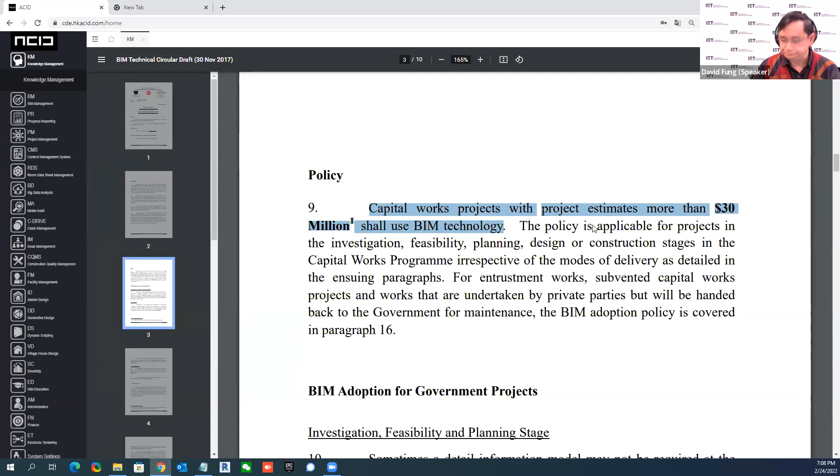But for this very first technical circular, the most important point is that we came up with a so-called BIM use table. Just to have a quick look, we have a BIM use table from BIM use number 1 to BIM use number 20. It covers feasibility studies, planning, design, and construction, and in fact it also hints at the operation side as well.

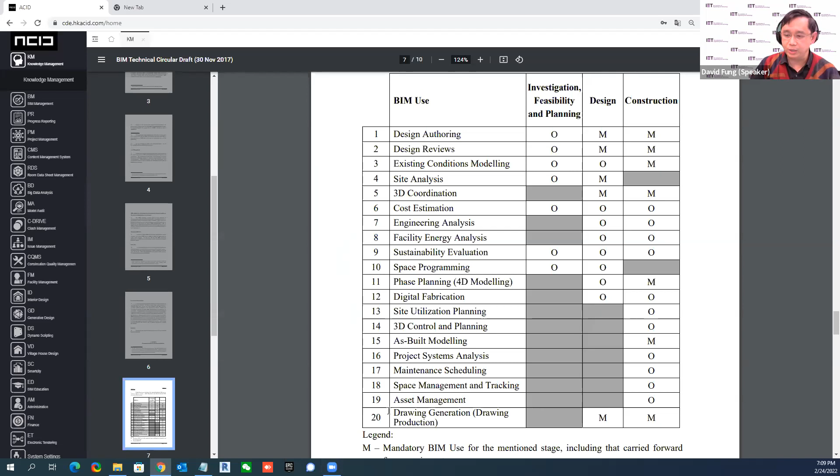Without looking into the details, may I just request you to look at the numbers here: the number of O, optional items, versus the number of M, mandatory items. You can see that back in 2018, the number of mandatory items is relatively small. Now, BIM uses 1 to 20. Let me compare with the latest one we just got.

What has changed throughout the years? As a matter of fact, every December there is a new version of this policy coming out. The very first thing we see is that the 30 million benchmark has not changed. It always states that any building and any construction more than 30 million shall use BIM technology.

But what does it cover? It covers capital works projects. That means if the project funding is coming from the government, they are all subject to this. So roads, tunnels, civil works, and buildings funded by the government are subject to this. Secondly, there are the entrustment works.

So a project for the airport, or a project for the underground railway system, are projects entrusted by the government to these specialists to build the airport or to build the MTR, for example. Those are called entrustment works.

Subvented capital works projects, if I understand correctly, refers to funding subsidized by the government to an organization that carries out its own project. Those projects belong to that organization, but the funding actually comes from the government.

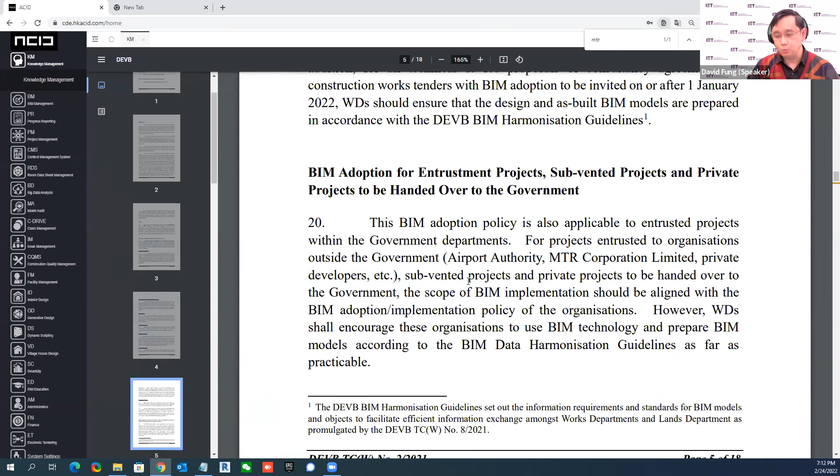So what it really means is it covers most of the work in Hong Kong, apart from the wholly private sector. That's the only sector not covered by this. If we search for a bit more definition on project entrusted organizations, that includes the Airport Authority, MTR, and private developers. So it has really wide coverage on the adoption of BIM. That is one important message: it has a wide coverage.

Secondly, if we look at the BIM use table I just mentioned, the number of BIM uses covered, from 1 to 20, has not changed. For the last 5 years it has always been 20, covering the planning, design, and construction stages. However, if you remember the number of M versus the number of O, there is a significant increase from optional items to mandatory items here.

This has already been implemented since January, and you can see that most of the items here are mandatory to use BIM. So this has huge implications throughout the years. Every December, many optional items become mandatory, leaving only a few optional. Every year there's a gradual implementation towards BIM adoption. So this is another important message to the industry.

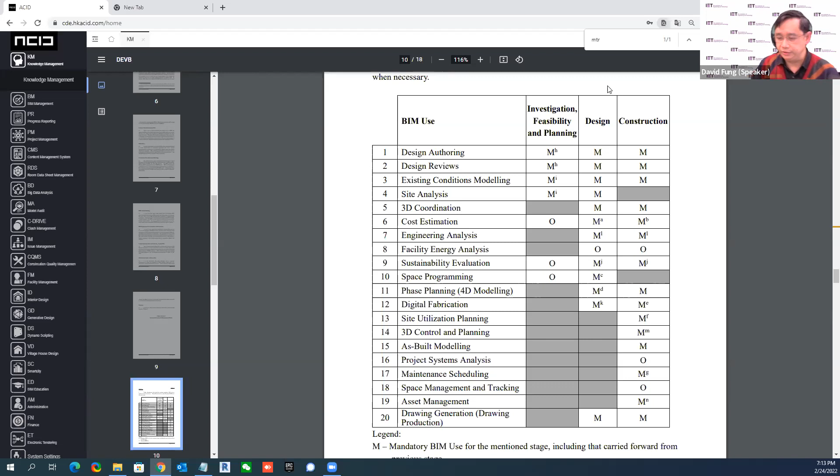Now let's take a look at a little more detail on the BIM uses. What does the policy say? How are we going to use BIM, for example? When you say BIM technology, definitely we are talking about the 3D models. We talk about the different disciplines.

Now, I would like to illustrate to you with real examples how that's related to the policy. You see on the screen here, I'm using a CDE, Common Data Environment, which I will explain a little bit more later on. I'm using an online system to demonstrate to you. Now, it covers stages: planning stage, design stage, construction stage, and operating stage.

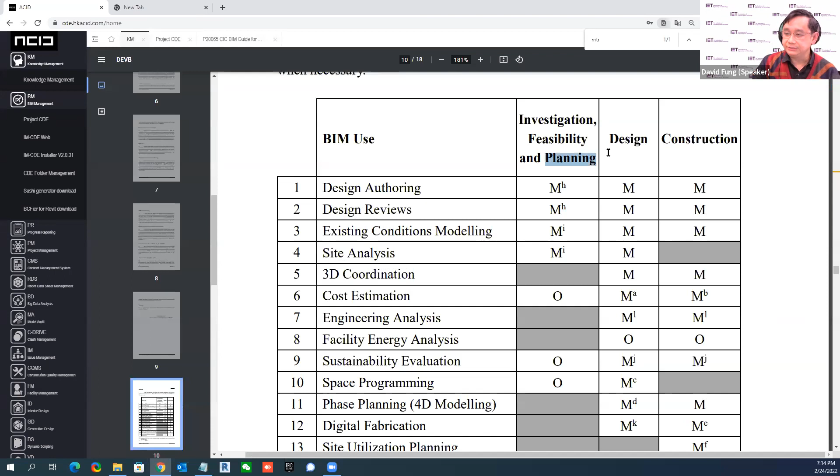All right. So the policies talk about the various stages, the different stages in here. So planning stage, design stage, construction stage. In fact, if you look at the wording here, asset management is talking about the operation phase, maintenance schedule, operation phase. So it is very, very obvious that we have all these different phases.

Secondly, when we talk about the BIM model, the BIM technology, it is not only on one discipline. It covers all the stakeholders, including the architect, the structural engineer, the MEP engineer, the civil engineer, all the stakeholders basically in the industry. So what that really means, they have to use this technology on their design work.

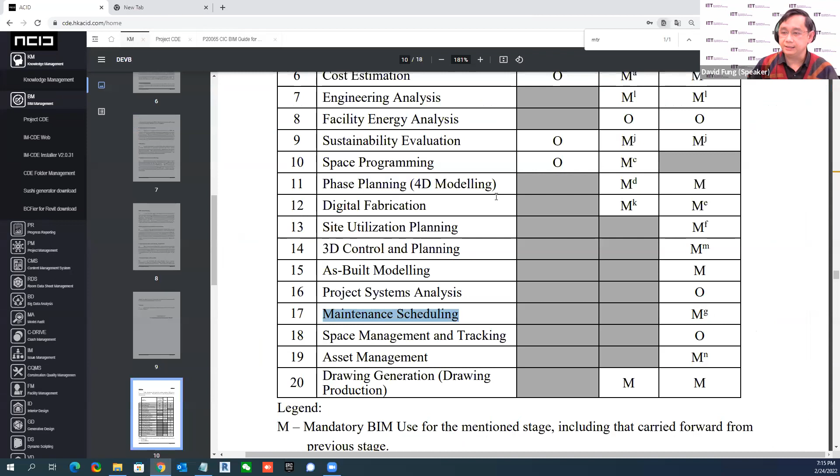Now, if we come back on the very first use in here, we will see that the very first item is called design authoring, which is in the planning stage, design stage, and construction stage. It is mandatory. Now, being an architect myself, I do the design work. Sometimes I do the planning work, and also I administer the contract. I create drawings for the government to approve. I also create the drawings for the tender for the contractor to build it, so it affects the construction.

Now, the policy says that any design author, whoever gets involved in the design, must use BIM for design. So in that case, in here, you will see that we are having the architectural model, the structure model, the MEP model, the landscape model, the civil model, whatever. So that affects every designer in the market.

Now, likewise during the construction in here, the contractor, whoever needs to get involved on the design side, needs to design the temporary works, the shop drawings, the coordination. So they have the builder models, the structure model, the MEP model, whatever. So we are talking about the design phase. We have a design kind of model. We have a construction kind of model in here.

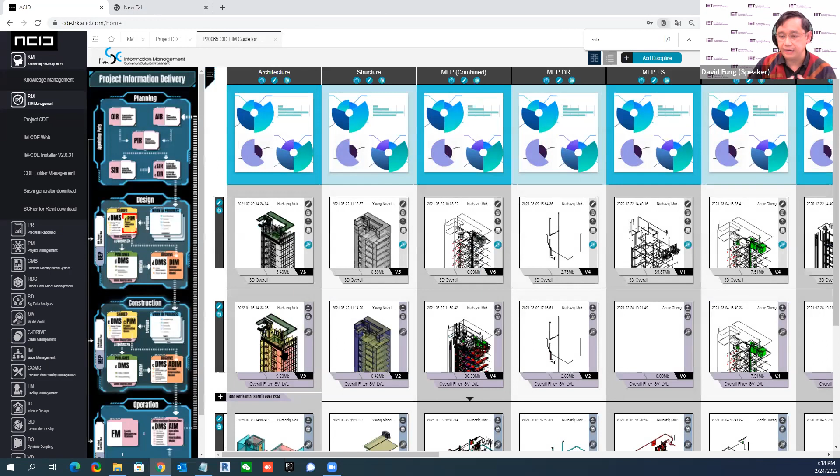Now, if I come back to the process, let me just say I'm in the design phase, I'm going to have some sort of design review. Let me just demonstrate by using some exercise. So we have the architectural design, then the structural design, and the MEP design, for example. We need to put them together so that we know what's happening there.

Okay, now we can see I'm looking at an architectural model. Now let me call upon a structural model, the design from the structural engineer, and I would like to see the design from the E&M or MEP engineer. So instead of calling up the whole model, probably I select the MEP on the 13th floor in here. Okay, let's take a look.

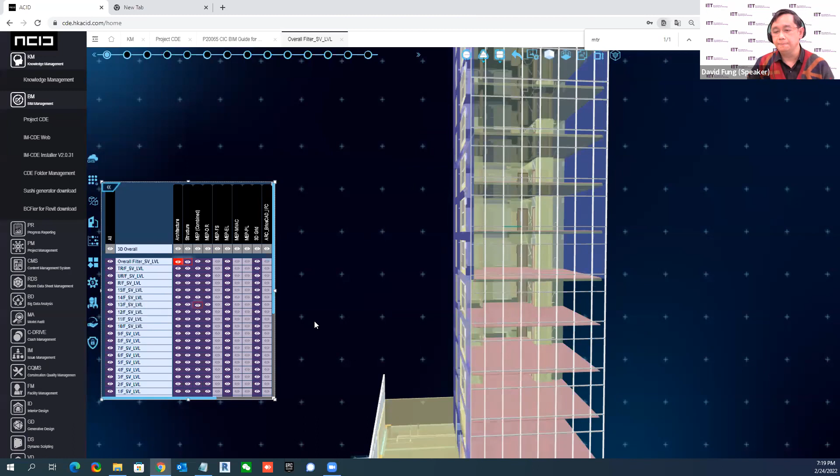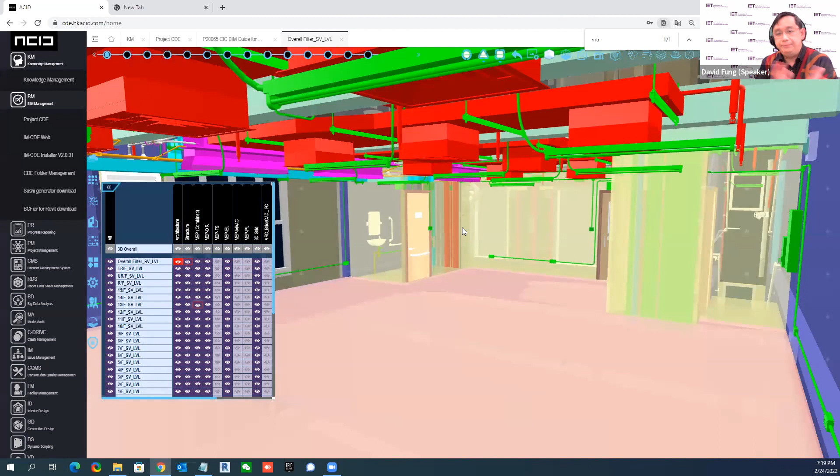Now, I just called up the different design models from different designers. They compose together and form a federated model in here. So when we put all the different design input together, we can see problems, we can see issues. So we need to talk among ourselves. What we are doing right here now is the coordination among different disciplines. We need to talk and we need to review the information. How are we going to communicate? So let me show you.

There's a list in here. I have some tags in here. If I click on a certain tag, it shows me where it is and shows me, okay, I got a problem somewhere in here: not enough headroom. We need 2.5 meters headroom.

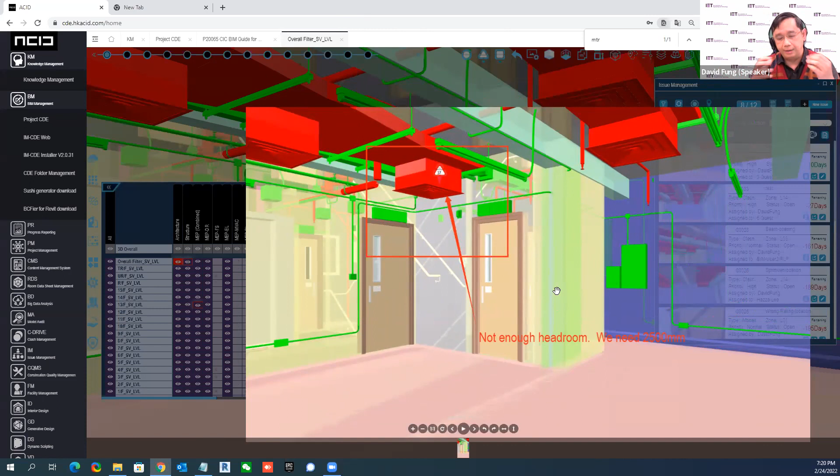Now, this is an issue that we find when we have all these components together, and we need to communicate the issue to the stakeholder. So you can see that the headroom issue is going to be sent to a certain person: by whom, to whom, where it is, what the issue is, what's the priority, what the status is, and what sort of deadline the other people have to resolve it.

Now, all this is a workflow that's happening during the coordination and review process. We need to record them, trace them, and follow up. You can see that here I give them a deadline of 10 days, so it becomes red. But on the other issue, someone has a record of minus 27 days or minus 161 days. Now, this is only a sample, right? It's not real. So that's why no one is dealing with it.

So we are going to have a communication platform. We need to communicate among the different stakeholders. In this case, the information is passing from one party to another, and that facilitates all these design issues, and construction issues as well. The same methodology applies. In fact, what we have been doing is 3D coordination, which is mandatory. So we are expecting the designers not only to do their own design, but to come together on a holistic platform so that we can exchange our design criteria and do the design review.

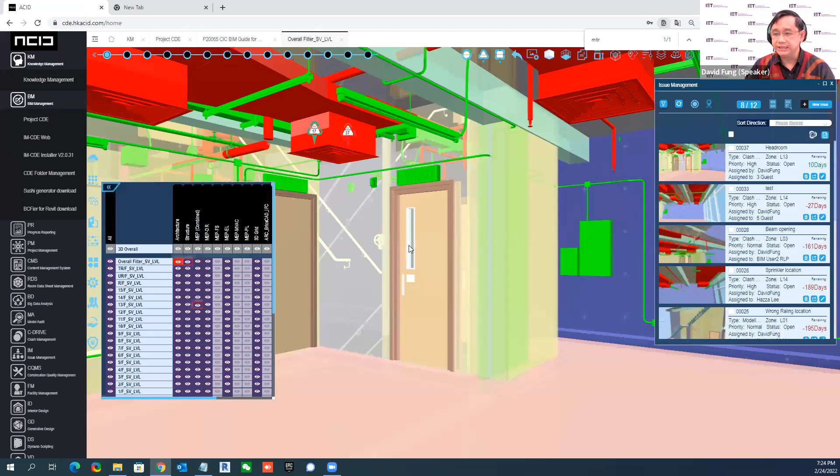But since the design is now in BIM, you can see on number 6 here the job done by the QS to do the cost estimation. Since BIM comes up with all this quantity, it's not a surprise for the government to say that we now have all these objects, and each object comes with its own properties. We have the quantity. If I select a door, there's the size of the door, the material of the door. If you click on the wall, the volume of the wall, the concrete, the surface of the wall. These quantities are embedded into the BIM model, and that is used to facilitate the QS to do the cost estimation.

Likewise, during the construction phase, the construction model also has all these specifications. It facilitates the contractor to procure the material, to check on the amount of money that needs to be spent on procurement, and also getting the payment certified by the consultant. All these processes are now under cost estimation, which is now mandatory.

Okay, now here comes a very, very debatable argument. Once this policy is done, the thing is, we know that cost is important. Definitely, cost is important for the project. Now, should anything happen if a QS measures a project and comes up with an amount, and what if something is wrong with the amount? Then there are a lot of implications if the amount is not accurate, right?

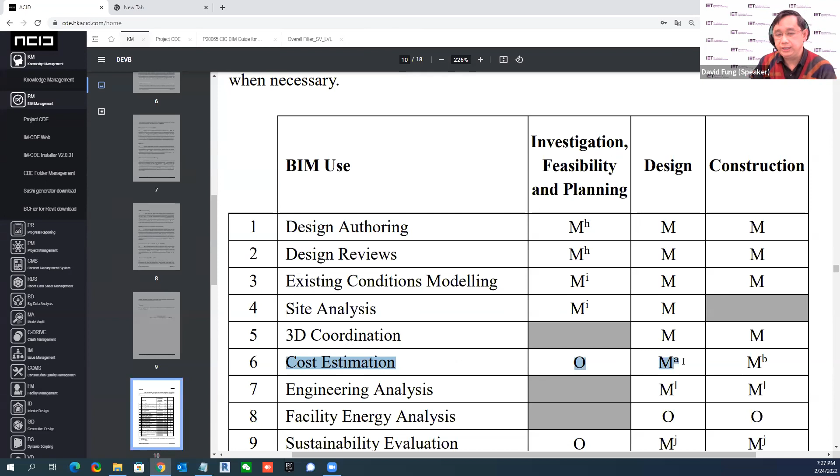The problem is whose responsibility is that? Is it due to the author or is it due to the quantity surveyor? It is very hard to say. Personally, I think both will have responsibility, but where is the line drawn? It actually gives us a lot of challenges in terms of professional liability. With the introduction of BIM, who is taking more liability?

I don't know. I don't have the answer for that, and that demands the different traditional professionals sitting down to define how it is going to be measured. Now, that is on the cost estimation.

Now, engineering analysis is mandatory. We have to do the structural calculations, we need to do acoustics, we need to do a lot of analysis. So engineering analysis, again, is mandatory to use the BIM model. In fact, since we've got a 3D model, the structural model can be linked to the structural calculation software to facilitate this. Again, this is mandatory.

The next item is energy analysis, which is still optional at the moment in the design stage and the construction stage. So how much energy is being consumed versus how much energy can be saved. This kind of analysis happens in the design stage and also needs to be verified after construction. This is optional at the moment.

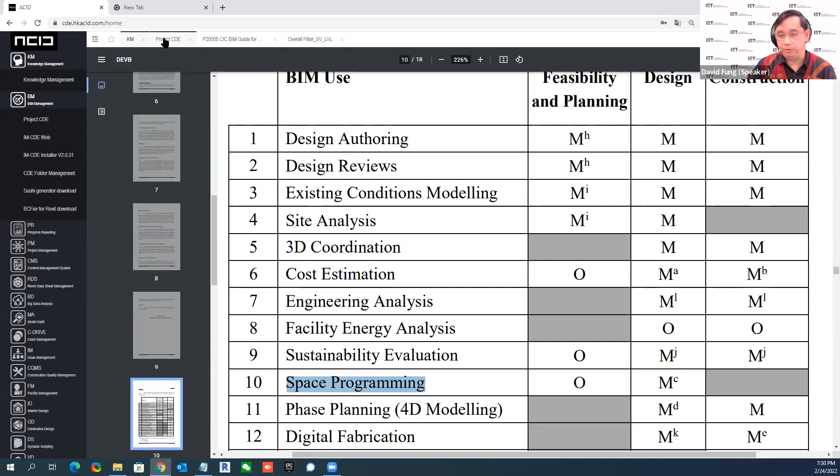Next one is more related to us as architects: space programming. Space programming refers to what is needed for a project. So how many rooms, what is the use of those rooms, and you can come up with different schedules: how many rooms, how many floors, how much space. That is from the design requirement, but does the design work comply with the client's requirement? So there must be a comparison in the process.

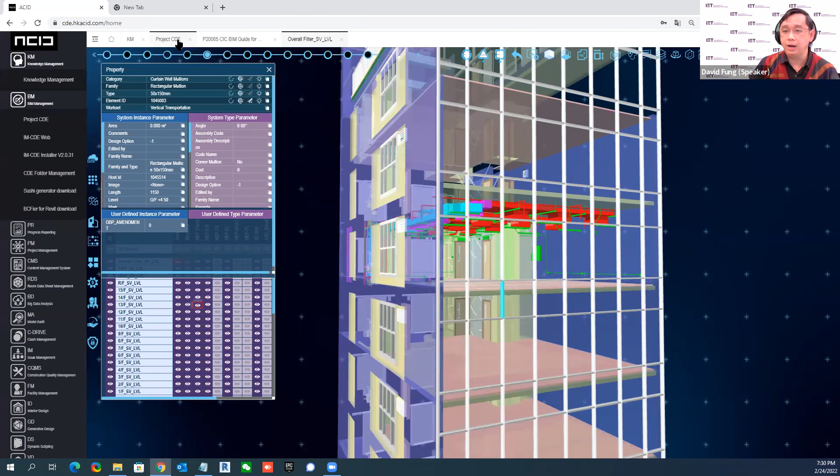So we have BIM as a model. We extract the information from the model and compare it with the client requirement. So that is on the space programming. Again, it is mandatory. As architects, we keep on changing our design. How can we adapt to all these changes efficiently enough?

That is by means of the use of BIM, and I'm not sure I can show you right here. Probably for this project I cannot. There are different functionalities to extract the information in terms of space relationships. Okay, so in the live session. All right, let's go to the next one.

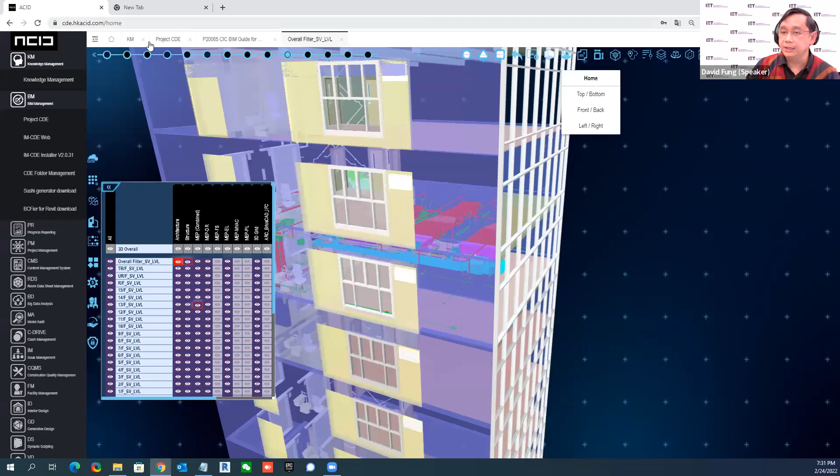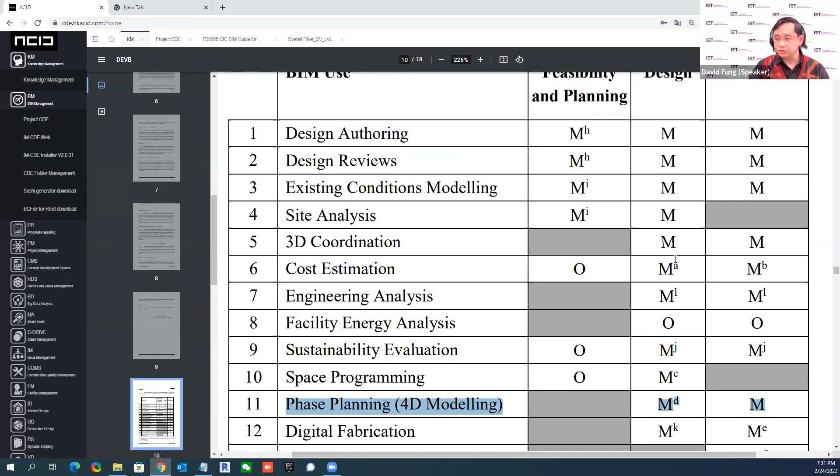After space programming comes 4D modeling. Talking about phase planning, you can see it's mandatory in the design stage and also in construction. When we talk about 4D modeling being mandatory, it makes sense for the contractor because we need to understand the construction sequence, how the building is built, and from there we can see the timeline. Let me show you the example, the very classical so-called 4D modeling.

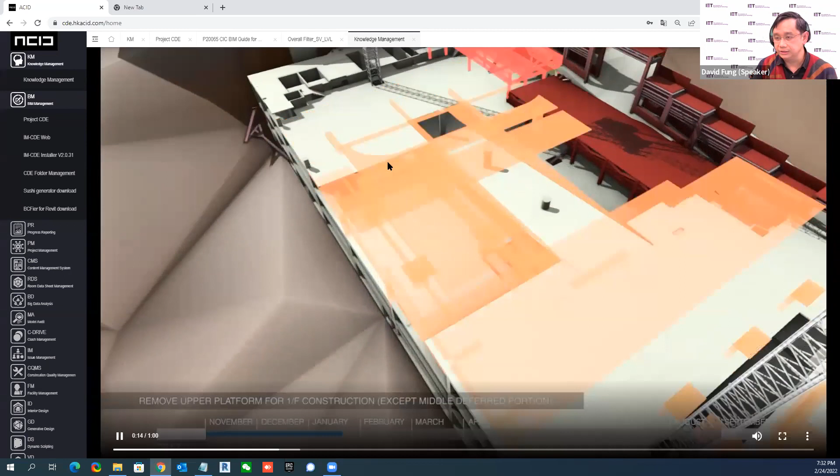Okay. So we have the site, we have the model, and you can see that we have a timeline underneath here, and what we're looking at here is how the different construction components are being, say, concreted from the left-hand side, right-hand side, just like that. Now it becomes a video for people to look at, so that we know what should come first, what should come last, and throughout the playing of this sequence, we can understand if there is any technical difficulty somewhere, and before it happens, we sort this out. Now, I think most of the BIMers understand the value of this process.

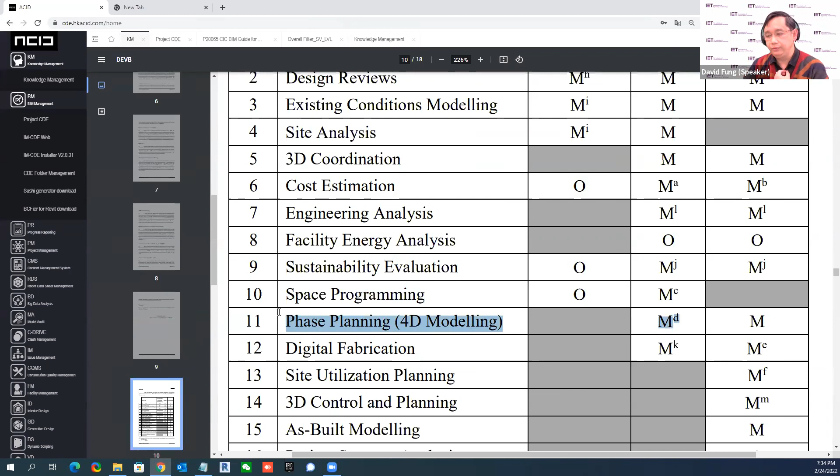Now, however, when we talk about this 4D, it is not only on the construction, it is now on the design phase as well. To start with, how can we as a designer determine the 4D modeling without understanding the construction sequence? Because for the construction, every contractor may have their own proposal, but why do we need that as the designer? Now, in fact, there's a definition in here. It is mandatory for construction activities with high to extreme risk. In government projects, they have all this risk assessment. If a project is assessed and the conclusion is that it is subject to pretty high risk, then for those projects we need to do 4D modeling.

Okay, now we have come across a bridge project, for example. For those people in Hong Kong, we know the Trunk Road Route number 3, 3號幹線, the expressway. There was a bridge near Nam Cheong Station that spanned across a very, very wide road in Hong Kong. That bridge was actually constructed vertically instead of horizontally. We know the bridge will be horizontal at the end of the day. But it was constructed vertically, and on one night switch-over, the two parts of the bridge just came down and connected in the middle. That was a very, very high risk project that stopped the traffic only for one night. So that construction is a very risky project, and so 4D programming is a mandatory requirement. All right.

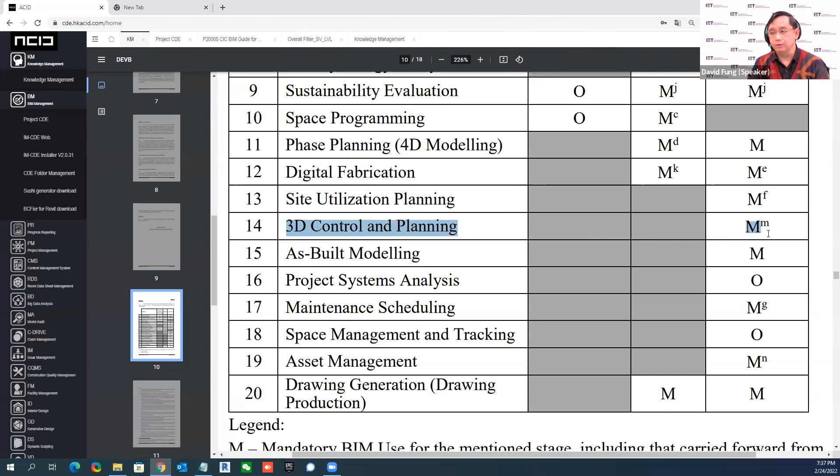Now from here, we start to talk about the site, the construction area. So site utilization planning. You have just seen in the 4D presentation how we integrate all the different components together. Where's the tower crane? Where's the material? What's the best use of the space? That is again mandatory. 3D control and planning: the site needs to be set up, we have the BIM model, so how this setting out is controlled from the BIM model, again, mandatory. As-built modeling is required as mandatory. The contractor needs to produce all this information for the as-built. We may come to a little bit more detail on that as-built.

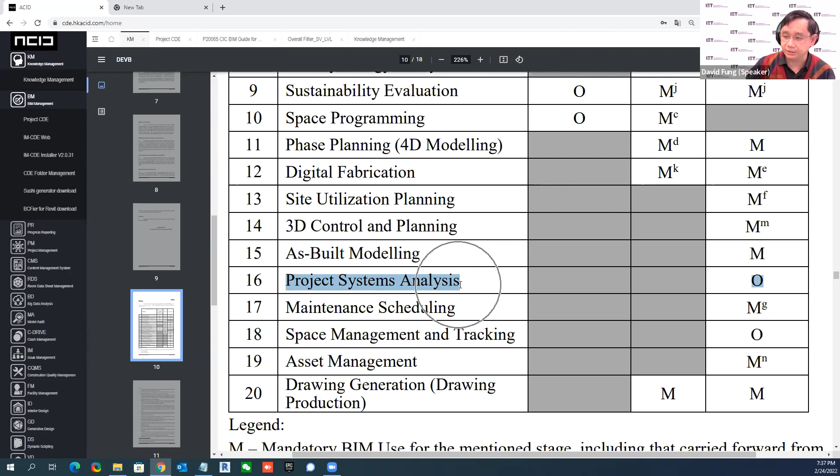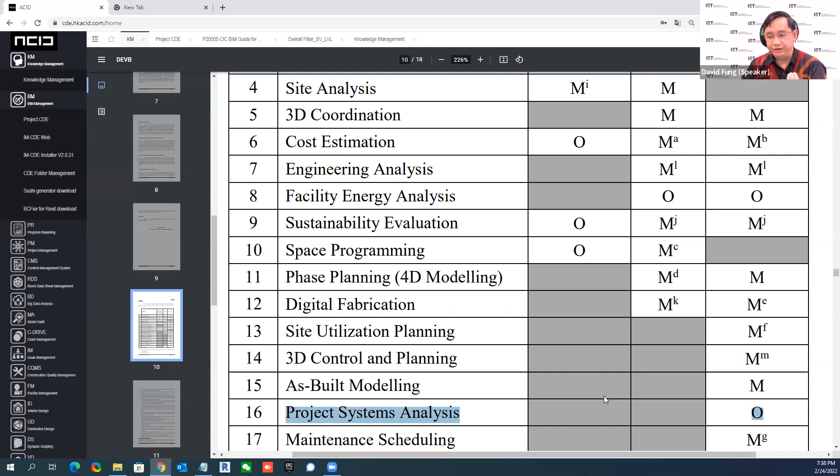Now, project system analysis, another BIM use, which is optional. So what does it mean? We know the design is done by the designer, which is mandatory. During the design stage, the system parameters need to be defined. But are those design criteria being met? Especially on the MEP side, whether equipment is actually performing or fulfilling the requirement as defined. So we need to do the analysis on the as-built versus the design. We need to check and record the performance of a certain system and put it back into the BIM model so that we have a record of all these analyses during the handover stages. So that is optional, not yet mandatory.

The next one here, maintenance scheduling. Again, it's a little bit difficult to understand what maintenance scheduling is here, which is mandatory.

Now, let me give you an example. A designer designed a plant room. Inside the plant room, there's certain equipment, say a pump inside a pump room. Now, the contractor is building the pump in accordance with the design specification. They find a product, a pump, supplied by a supplier. It comes with the catalog, the installation manual, the operation manual. Now, that kind of thing, that's okay.

But once the building is finished and moves into operation, maybe in just 2 months' time, the pump room is flooded with water. So what happened there? Why is it flooded with water after completion? They try to find out, and they find that the supplier of the pump provided a manual, and the manual says every month you need to clear the pump following certain procedures. Because the operation didn't follow the instruction, the pump got blocked, and that's why we got flooding.

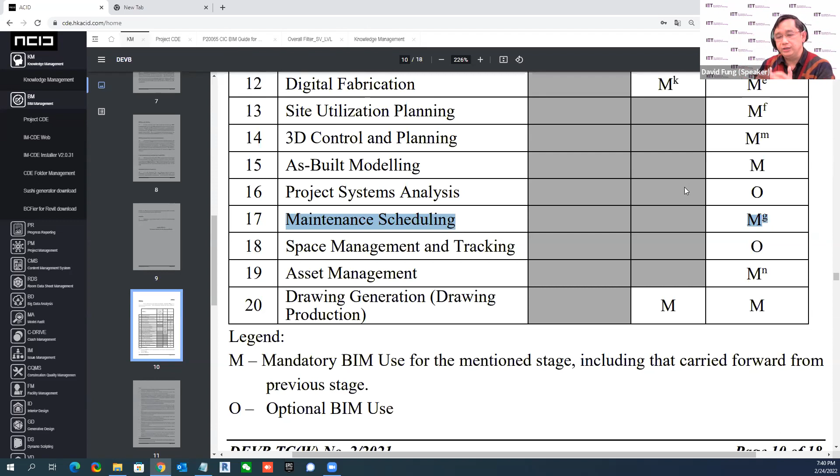Now, the thing is, the maintenance scheduling of certain equipment needs to be attached to a BIM model, so that in operation, when we screen all these items, we know which item we need to maintain in accordance with a certain schedule. So that sort of information is now required from the BIM use, on the maintenance scheduling.

Now, number 18 here, space management. Since we have done the space programming at the design stage, say we need to have 100 classrooms. At the end of the day, in the as-built model, we have 100 classrooms. Now, how are those classrooms being used? We need to provide the lighting, the air conditioning. A certain lab classroom is available on a certain day, at a certain time, and in the next hour a certain class is going to attend that classroom.

Those kinds of space management issues and tracking, how are we going to make use of the BIM model to help us facilitate that kind of management? Okay, now it's optional at the moment.

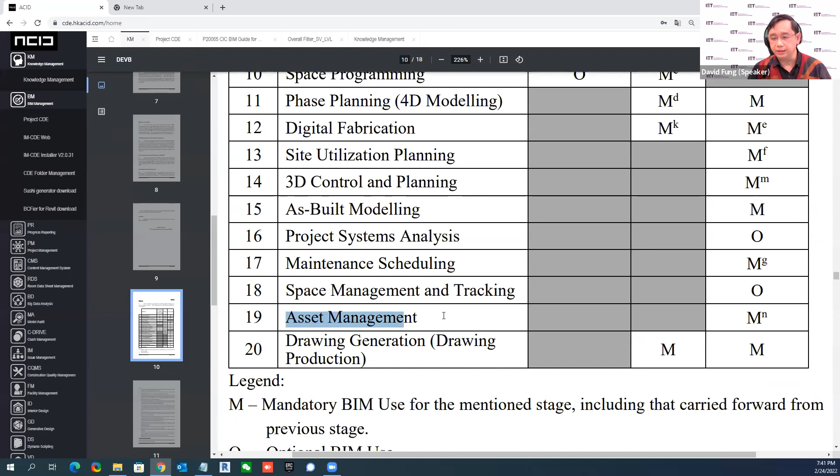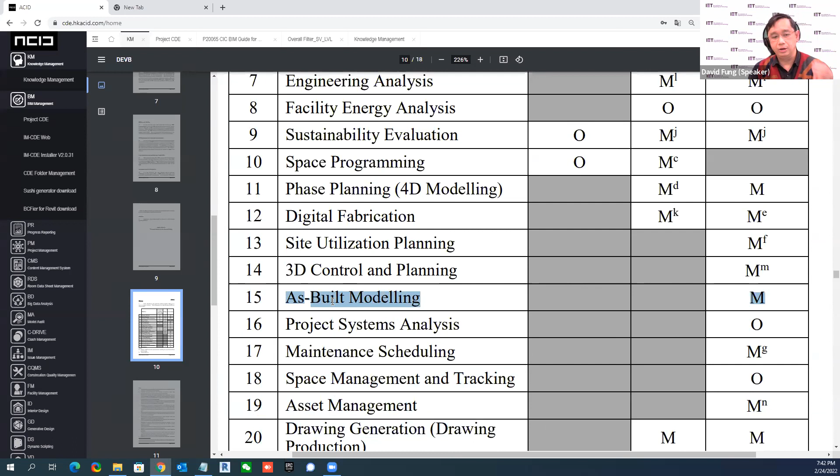Now, number 19, asset management. Asset management is now mandatory, mandatory for the contractor in the construction phase. If you look at the as-built modeling, it already asks the contractor to build a model and submit the as-built model, and the as-built is used by operations for asset management. Now, this again has a huge implication.

Now, let me show you a standard, how it is set in terms of requirements. I'm showing you one of the standards, not the CIC one, but a very famous one from the ASD, the Architectural Services Department, called the BIM guide for facility upkeep. Because the government department is going to maintain the asset, here it is now being requested.

Asset management is mandatory. This department maintains over 8,000 government assets, government buildings. All these buildings are designed in BIM and constructed using BIM. After construction, it's passed to the operator to maintain it. So it says here, before you pass me the as-built BIM model, the BIM model must contain certain elements. Let me show you.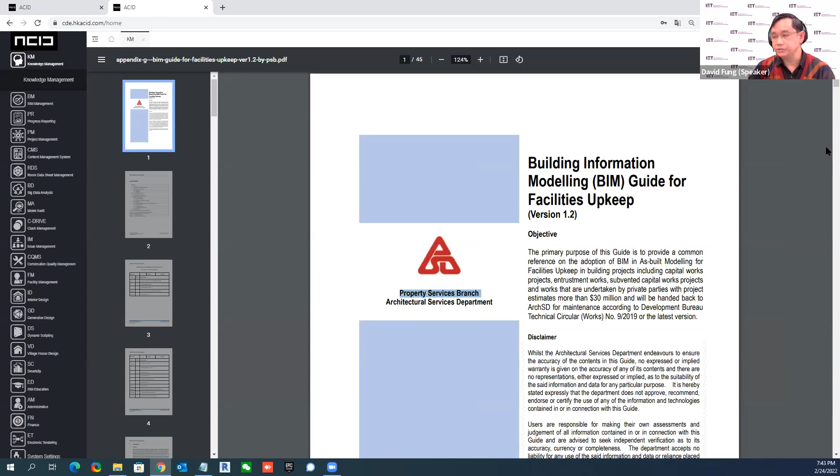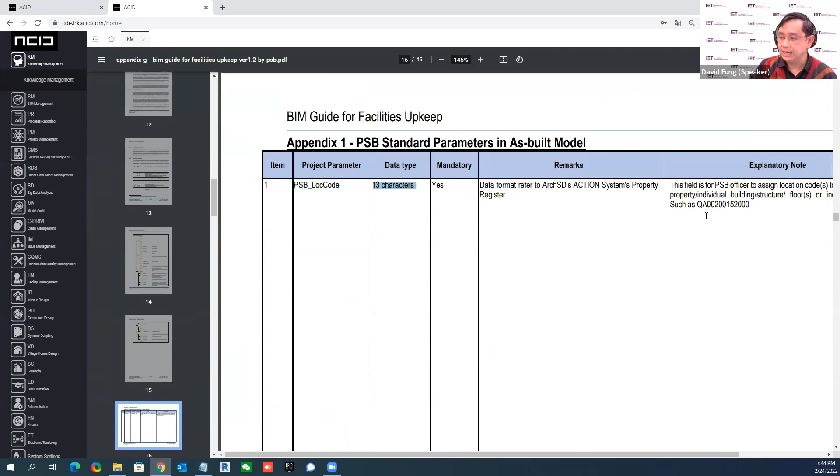It says the as-built model must have standard information, standard parameters inside the model. Requirement number one: the model must have a parameter called location code. It is 13 characters, something like this. That is number one. Then requirement number 6, number 15, 23, 31, 40, 46 requirements.

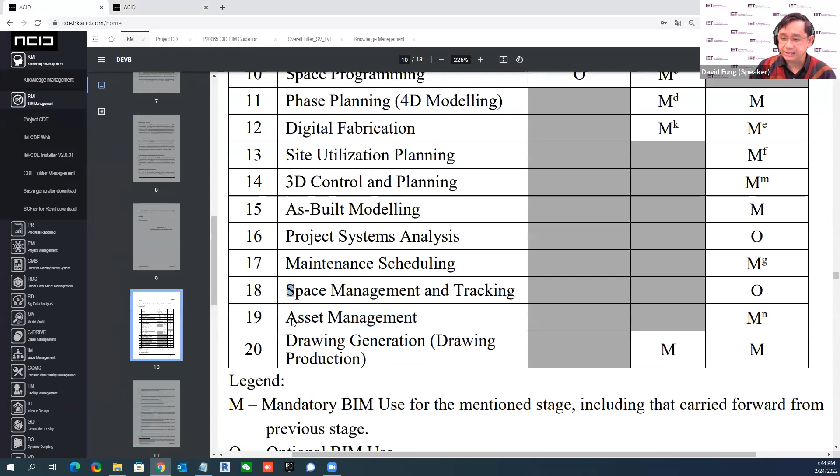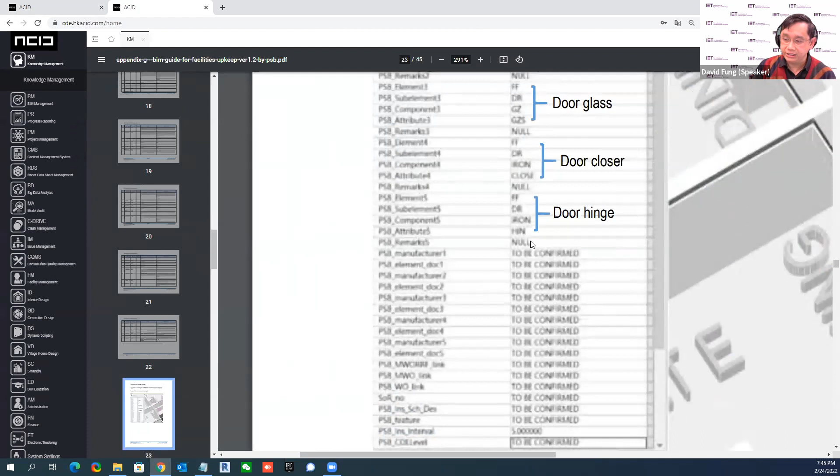Now, what does it really mean? In asset management, they require 46 pieces of information from the as-built model. The main contractor needs to give back to the client an as-built model with all this information. They give you an example: one door in the model must have these 46 parameters. A window must have this location code, this information. So you can imagine every single object comes with a huge list of information needed.

And how many windows in a building? How many doors in a building? If you have 1,000 windows, you have 1,000 times 46 pieces of information that the contractor needs to input. So it has a huge implication in terms of asset management here, and in terms of the as-built modeling. So the amount of effort, time and resources to input this information into the BIM model is quite phenomenal. Now, I'm just quoting the example from the ArchSD on the door and also on the window.

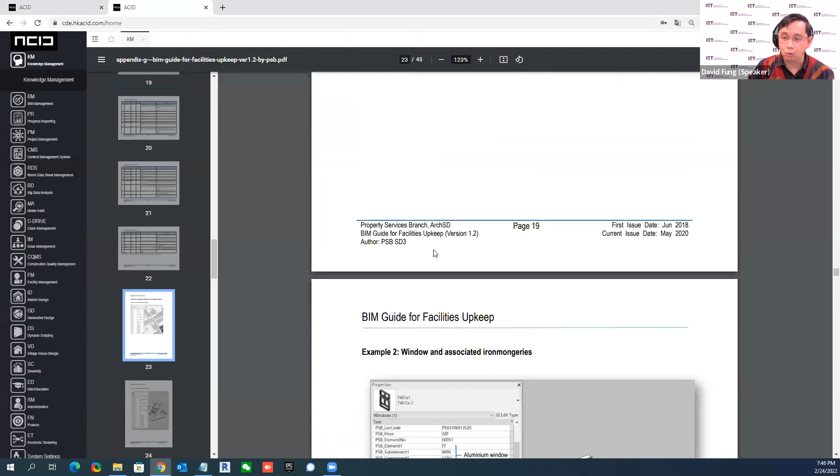Right? Let me show you another requirement, another standard. This standard is coming from another government department. It's coming from the EMSD, the Electrical and Mechanical Services Department, on the MEP side. You can see the BIM for Asset Management Standards and Guidelines. It's been published since, I think, 2017 for version 1. So it's been several years.

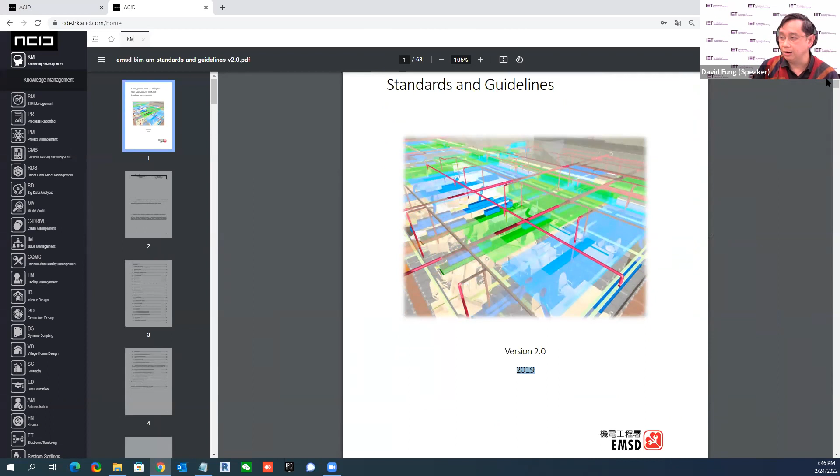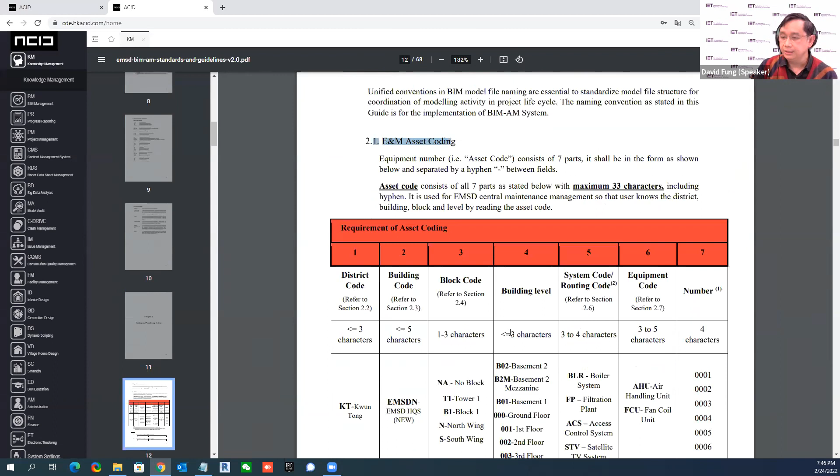Now, what does it say in here? With the as-built model, the contractor needs to name every single asset with a certain code. So they have all this code to follow. To give you an example, you have an equipment. That equipment will have this coding. And all this coding has a certain naming convention. All this coding should have

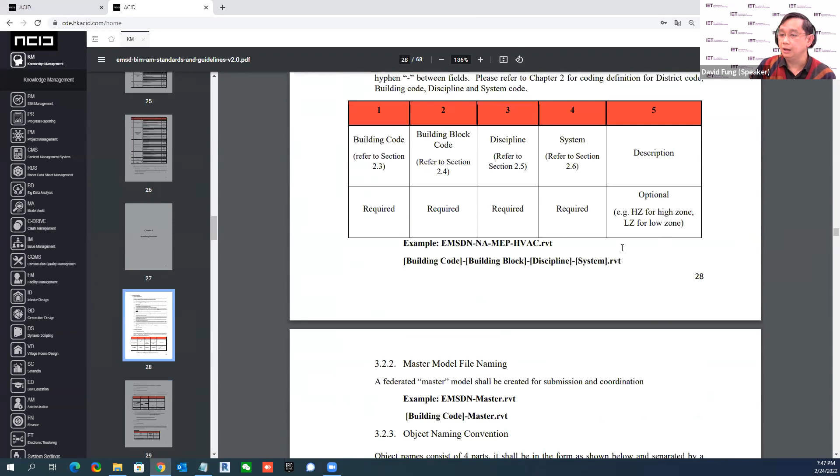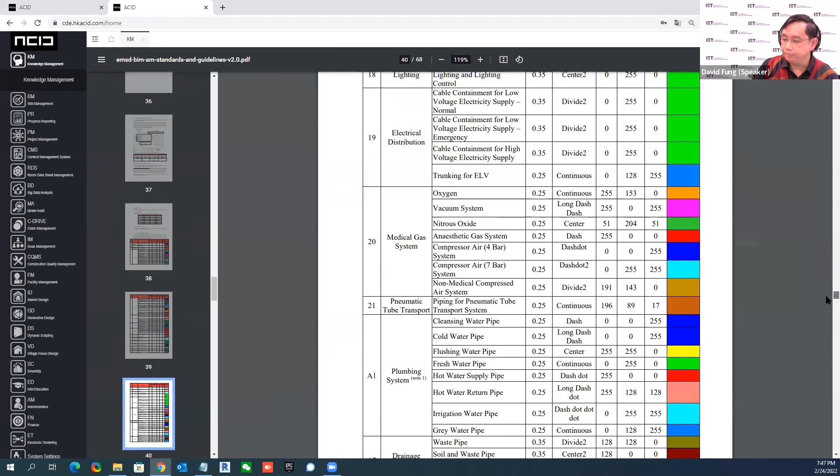certain units. Okay, so units are standardized. They have certain standardized symbols, standardized system naming, standardized coloring. And more importantly, if you scroll down in this standard, one equipment has this code, and this code has a function, location, relationship, ID, tag number. You can see this is required. If you count the number here, it comes up with, I think, 48 or something. Nearly 50 pieces of information per object.

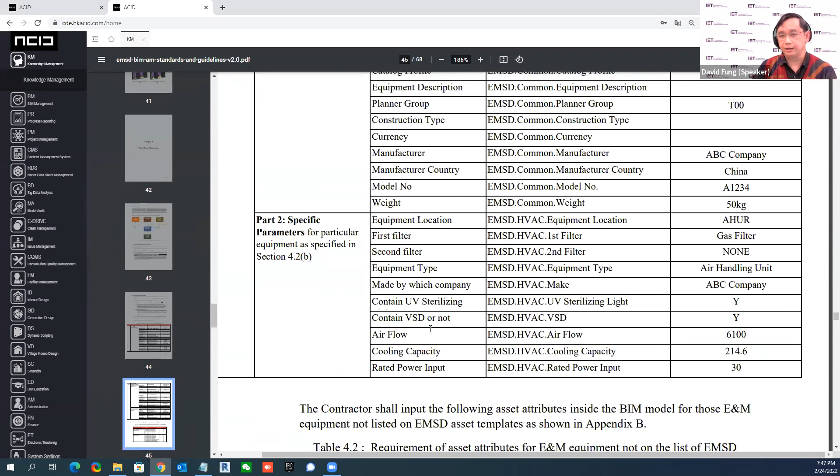So you can imagine how many lights in a building, how many power points, how many switches, how many equipment in a building. And now the government is asking: we need to have all this information to maintain our system. Use BIM for asset management, which is mandatory. As a contractor, you need to input all this information into the system so that we can run it. So you can imagine the amount of time and effort in there.

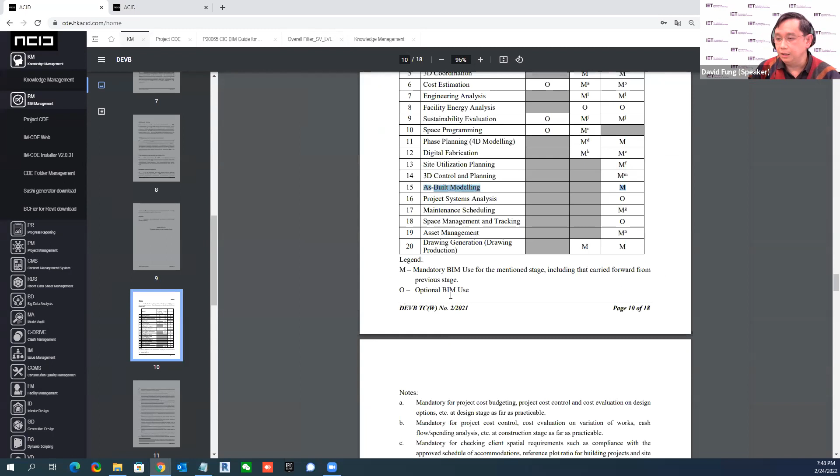Now, okay. Wow, I'm looking at the time, it's a bit overrun.

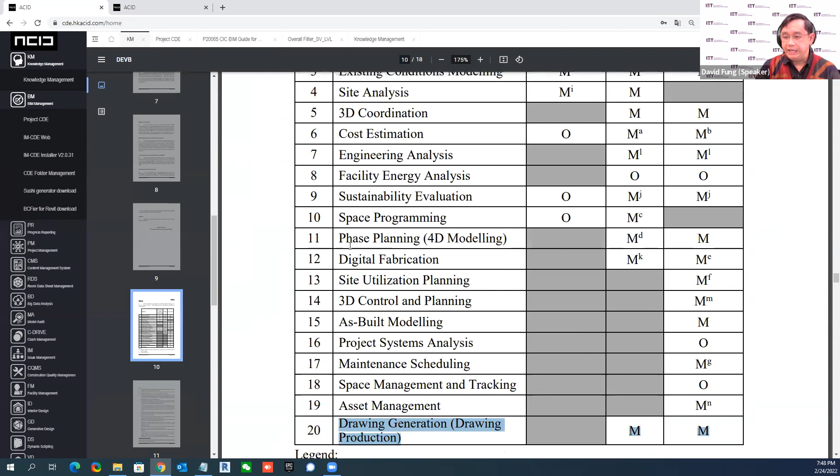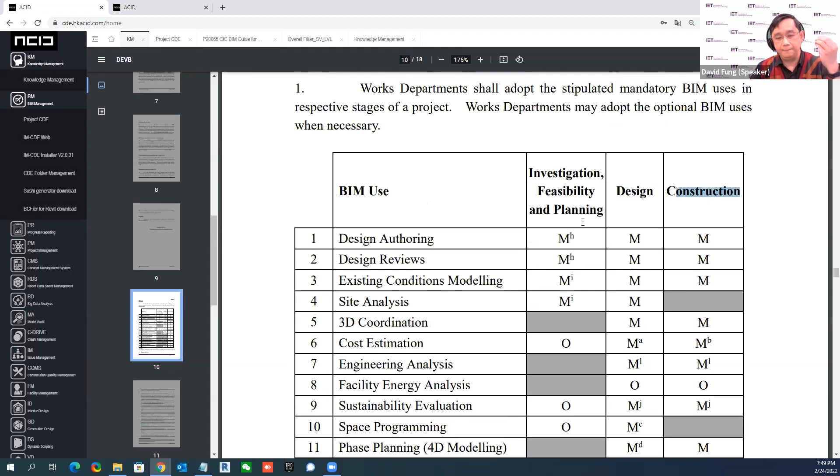Now, with all this, the most important one here: drawing production, mandatory. To me, it is the most important implication from this. After the design, after all this, our contract, our legal documents, are in drawings, and all these drawings are now required to be produced using BIM. Imagine all the submission drawings, all the tender drawings we produce, are now required to use BIM. So designers, contractors, combined services drawings, all the shop drawings, any drawing needs to be produced by BIM. This is a very, very harsh requirement, really.

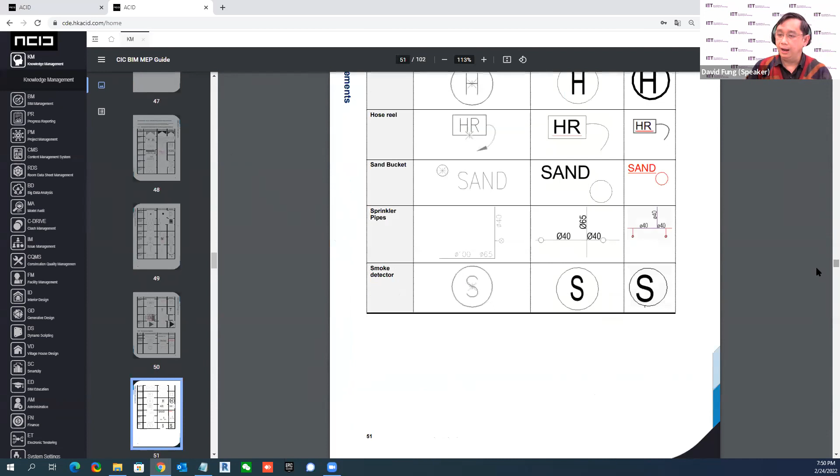Having said that, let me show you another standard. For example, the CIC standard. Let me show you the MEP standard. Over the years, all these standards are now, I would say, done. You can see that this is the MEP standard for statutory submission. Inside here, they have all these requirements. Let me show you on the content page.

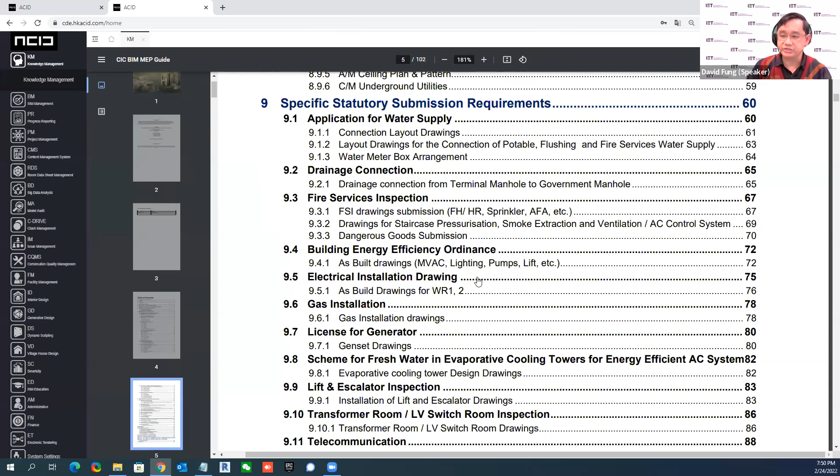Since we're talking about standards now, look at the production drawings for water, for drainage, for fire services, for energy efficiency, for electrical, for gas, for the generator, for the freshwater cooling tower, for the lift and escalator, for the transformer room, for the switch room, for telecommunication. Basically everything. So just take a look at the sample. You can download it from the web page here.

Now you can see the generation of information, generation of drawings from BIM. Take a look at this sample. All these drawings you see here are actually produced by BIM software. No longer CAD drawings. All you see here is from BIM.

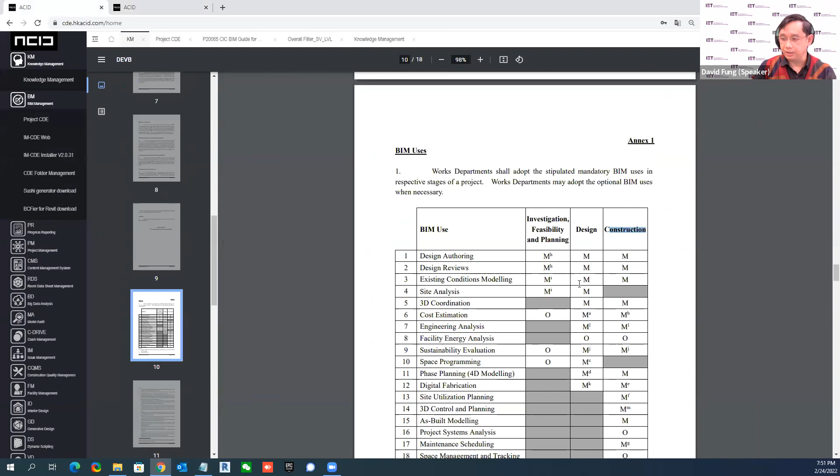Now, if you come back to this technical circular, the policy on this item, look at number 26. It says that the industry is used to using CAD to produce drawings. But for BIM projects, the 2D drawings shall be generated from the 3D model. So we must have the model first, and then we generate the drawings. Works departments and the consultants they engage, meaning the designers, architects, engineers, contractors, main contractors, subcontractors, shall cease producing drawings by other platforms. No more CAD drawings. All the drawings need to come from BIM.

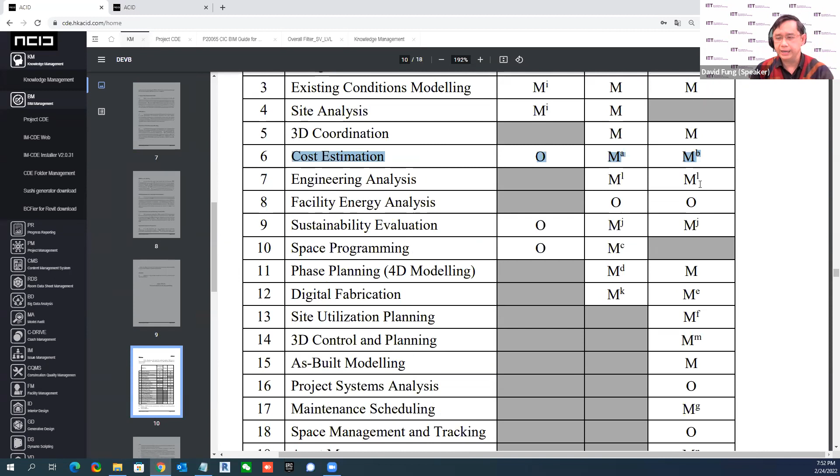So this is a very, very strong statement in here to cease production drawing. So what that means in the BIM use table: the drawings, the design from BIM, coordination from BIM, the drawing is from BIM, the cost is from BIM, right? Okay, all this, what I just described, are mandatory. So you can see the significance in here.

Now, in terms of policy, I think it's quite a lot. Now, come to the next item, the CIC standard. So when we talk about all these policies, nevertheless, we need to follow a certain standard. Now, let me just do a very quick introduction on this large document here. Because of time, I don't go into all the details on the history. But this is an important standard that came along.

Showing you this, called the CIC BIM Standard General, already up to version 2.1. Now, the main point about this is it tallies with the ISO standard 19650, which is the international standard covering BIM production. Without going into all the detail, the important thing is it is an ISO standard.

Now, I would overrun a little bit. Okay, so all right. All right, a little bit. Let's see the main thing.

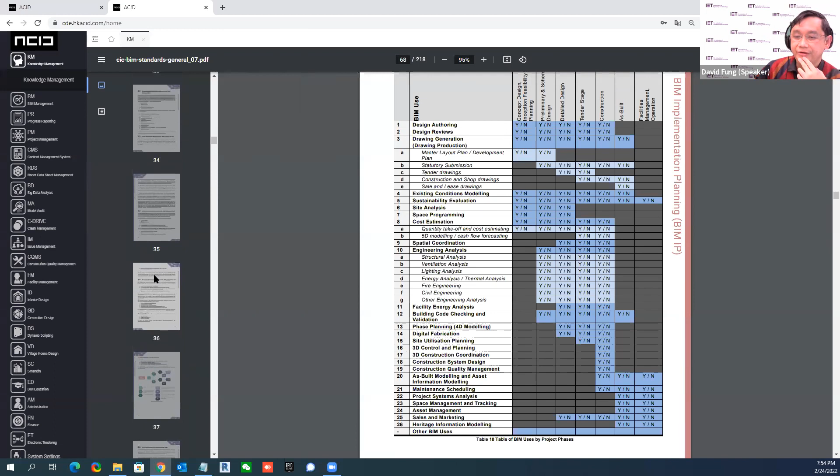Now, the main thing, you can see the BIM use. Actually, it is more than the policy. It's 26 BIM uses. Now, the other thing I want to show you, this standard here covers one very important aspect. Sorry, let me show you this one here. It covers planning, design, construction, operation, right? And also, take a look at this. So the standard general tallies with the ISO standard.

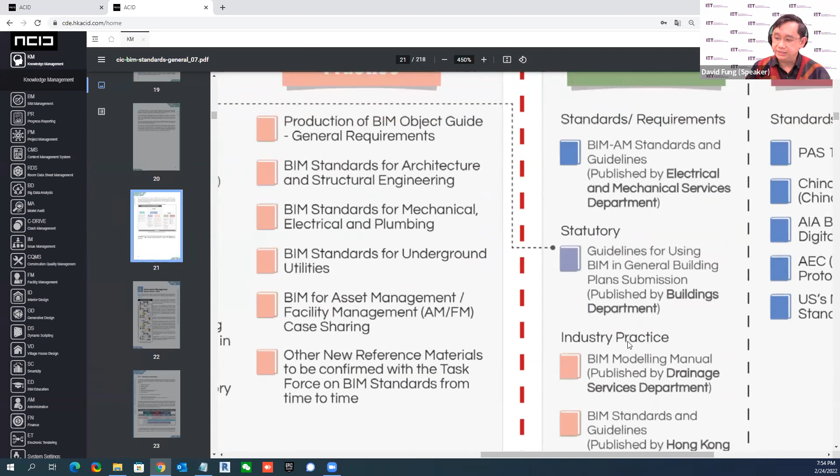The standard covers contractual areas, statutory areas, and practice areas. So as a designer, we need to do statutory submission. The Buildings Department in Hong Kong actually publishes guidance on using BIM for general building plan submission. That's on the architecture side. Now on the structure side, you can see this.

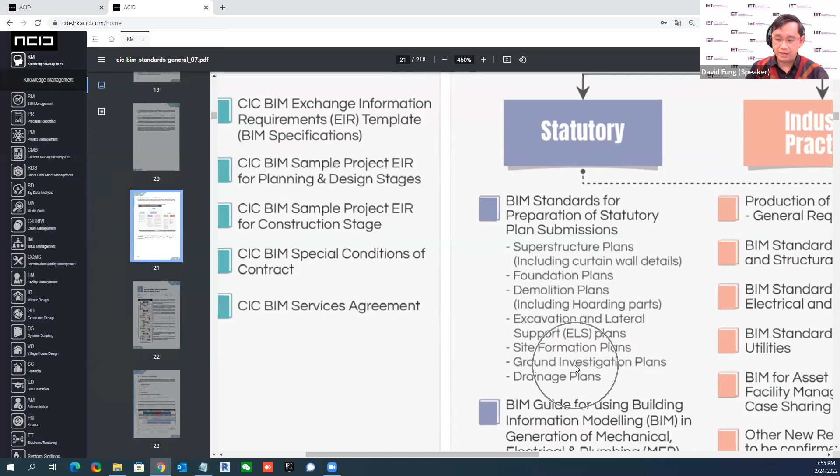Under the publication, we have standards for superstructure, curtain wall, foundation, demolition, hoarding, excavation and lateral support, site formation, GI ground investigation, and drainage. That is for the structural side. For the MEP side, I just mentioned that standard to you. So basically, for the architecture, structure, and MEP production of statutory drawings, we have CIC standards.

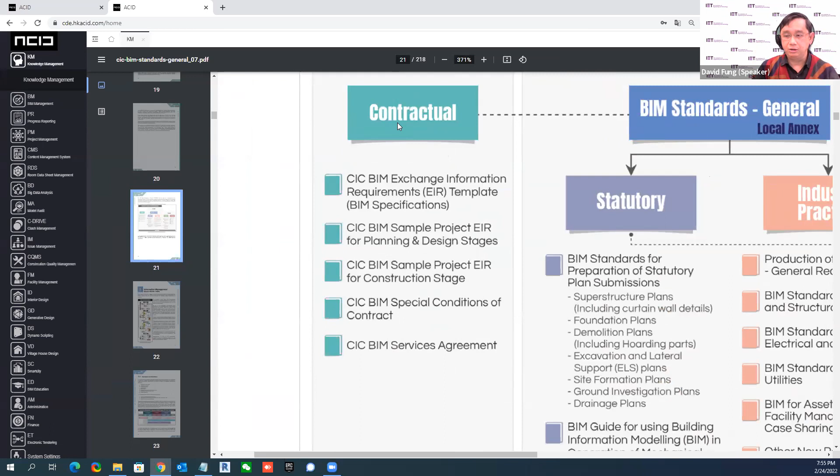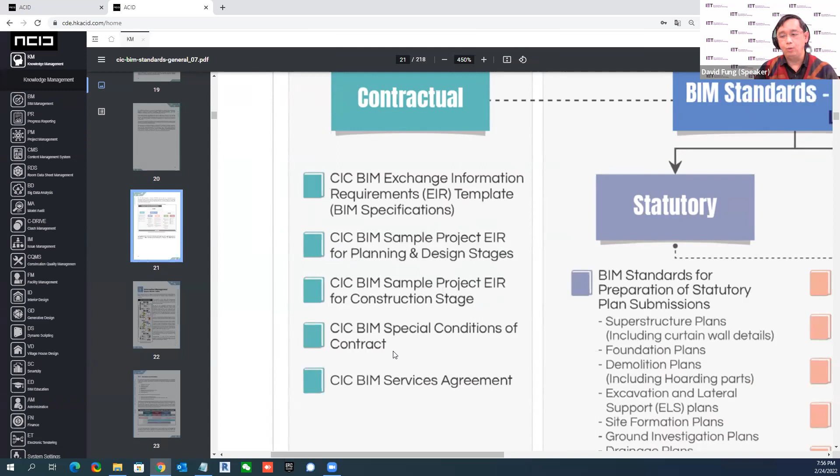For this one here, contracts. EIR is a jargon. So in here, BIM specification: specification for the planning phase, design phase, construction phase, all published. Then we talk about the contract side, the special conditions of contract, how to exercise the BIM contract within the main contract. We have this standard. For the engagement of BIM service, how to engage a consultant to do BIM service, there is a BIM service agreement standard, all published.

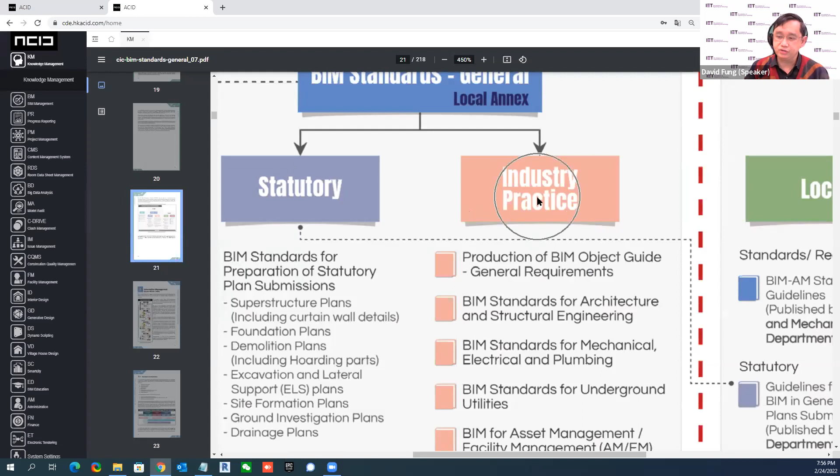Now, there's some good practice or better practice, that's industry practice. When you say BIM, it always starts from the BIM object. So the production of BIM object standards, published. Standards for architectural and structural engineering on BIM, published. Standard for MEP good practice, published. Standard for underground utility, published. AM/FM case study, published.

Now you can see that over the last couple of years, all the areas, on the drawing side, the submission side, the contract side, the specification side, the practice side, basically everything is published. So it is a whole collection of standards available. Of course, we don't have the time to go through each one of these, all right? There's a whole lot of policy and standards.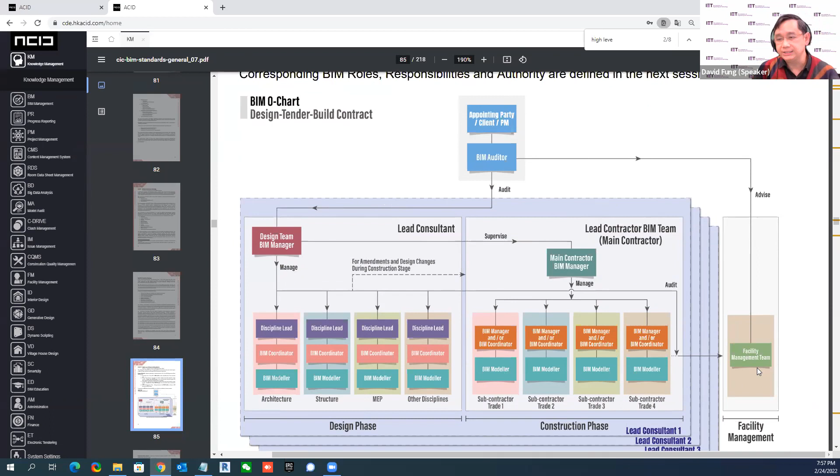Now with this standard, you can see that there's a role called BIM auditor on the client side who has to make the decision to ensure the design side has a BIM process. So during the design phase, there's a BIM manager overlooking the multidisciplinary interaction. So the architect, the structural engineer, the MEP, they have their own discipline lead.

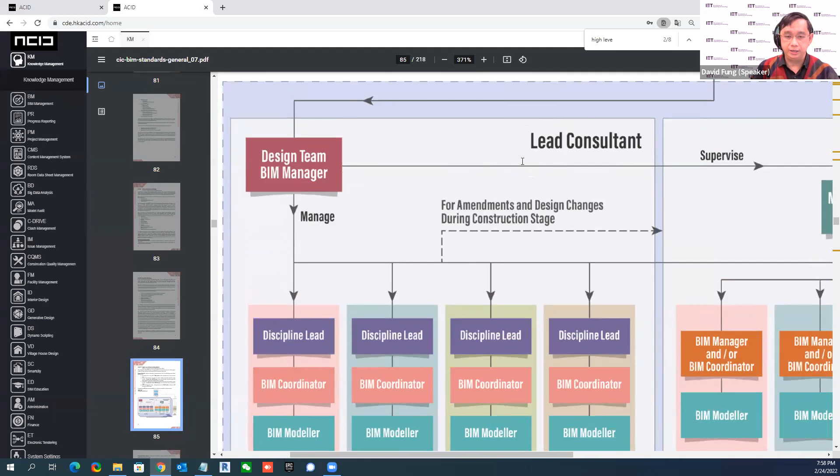They have the BIM coordinator. They have the BIM modeller to model it. So we have the architecture model, structural model, MEP model, civil model, other discipline models. Now you have this BIM manager to manage the cross-discipline phases. Now we come to the construction phase.

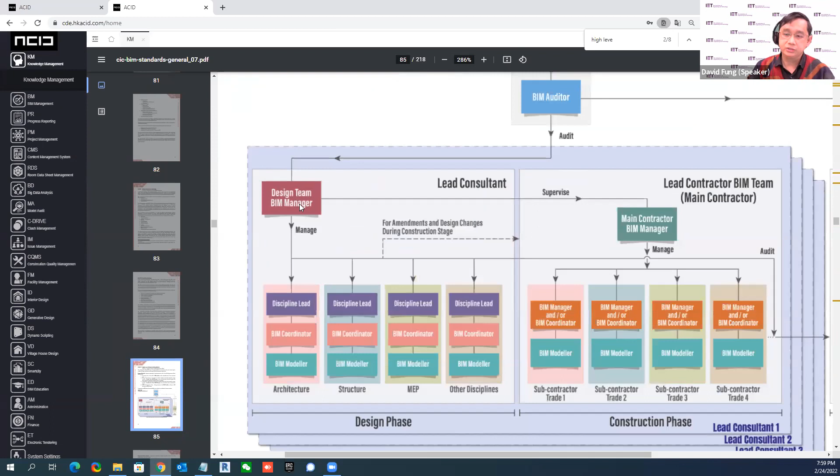In the construction phase, we have the trade ones: the concreting work, the steel work, the curtain wall work. Then we have the BIM manager in the construction phase to cater for this. Every single trade has the coordinator and the modeler in here. Now the contractor needs to submit for the consultant to approve their submission. That's why we have this BIM manager overseeing this.

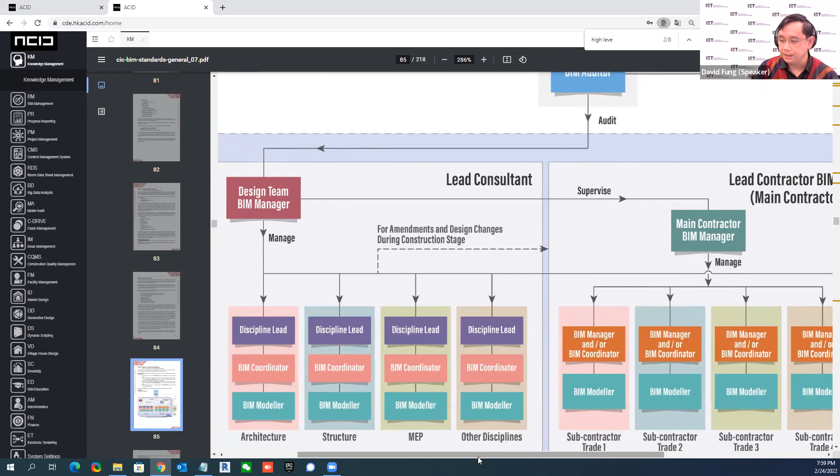Now at the end of the construction, the information needs to pass to the operation phase. In this phase, who is going to approve this? Again, the BIM manager. It's prepared by the contractor, but approved by this BIM manager. And the facility management, how are they going to use the information? With the help of the client side BIM auditor, we'll help them carry out all this.

Now, you keep on hearing me say BIM manager, BIM coordinator, BIM modeler. These kinds of posts, this kind of competency. What is a BIM manager? Who can be a BIM manager? Who can be a BIM coordinator? This is on the standard side. Now let's go back to this technical circular. Let's take a look at the CBM.

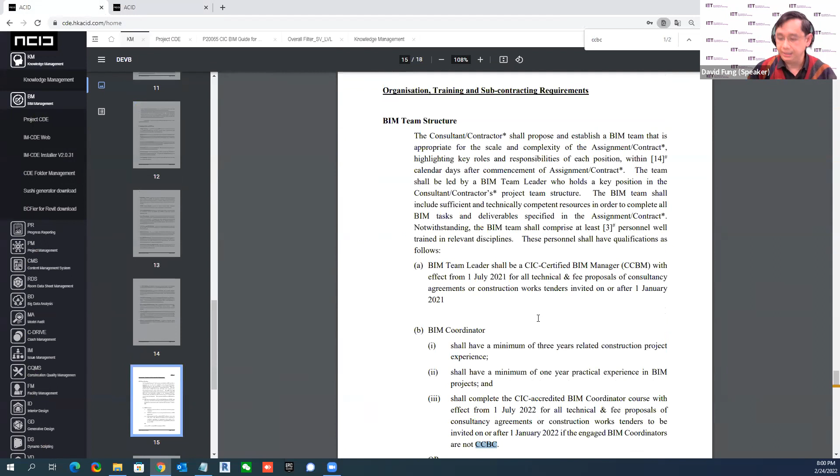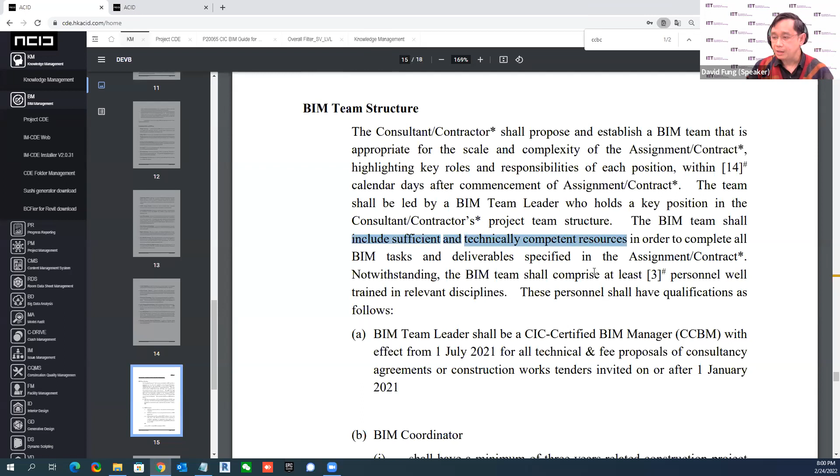It specifies under policy that every project over 30 million needs a BIM application. On each one of these, we need to have a BIM team, with sufficient and technically competent resources to do the job, led by a team leader. In terms of policy, we now have definitions. The BIM team leader needs to be a CIC certified BIM manager, the so-called CCBM. Effective from July, any project needs to be led by a BIM manager who is a CCBM.

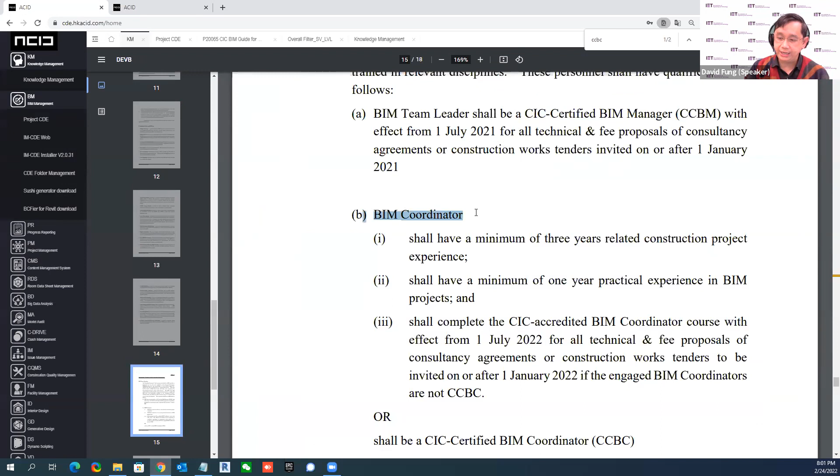If you look at this one, on the client side we need one BIM manager, number 2 a BIM manager for the design side, number 3 a BIM manager for the contractor side, and probably a BIM manager for the operation side as well. All these roles, as defined, need to be CCBM from 1st of July. Then for the BIM coordinator, they list a 3 years requirement, 1 year on a BIM project, starting from July 1st this year.

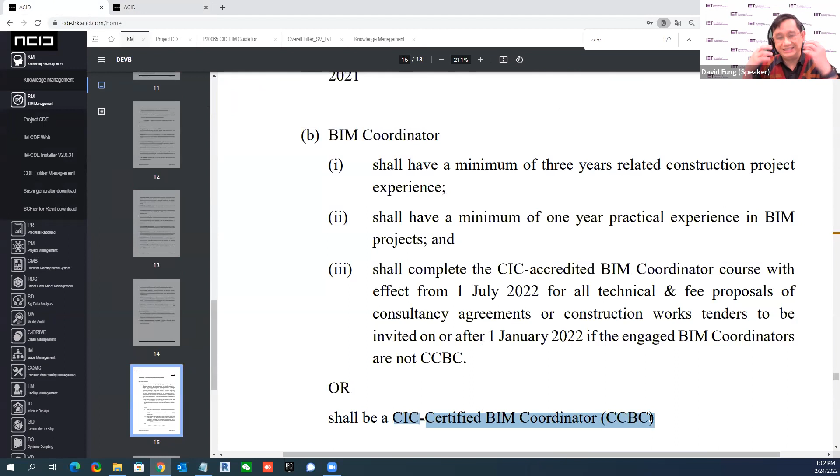They shall complete a CIC accredited BIM coordinator course or be a CIC certified BIM coordinator. If you look at the org chart, how many BIM coordinators? Each discipline should have their own coordinator, so one project will have many BIM coordinators, and each needs to be a CCBC. We don't have time to go into details on CCBC and CCBM, but in terms of policy it's now defined in the Hong Kong sector. All of a sudden the BIM requirement becomes so significant, and they need to complete the BIM courses.

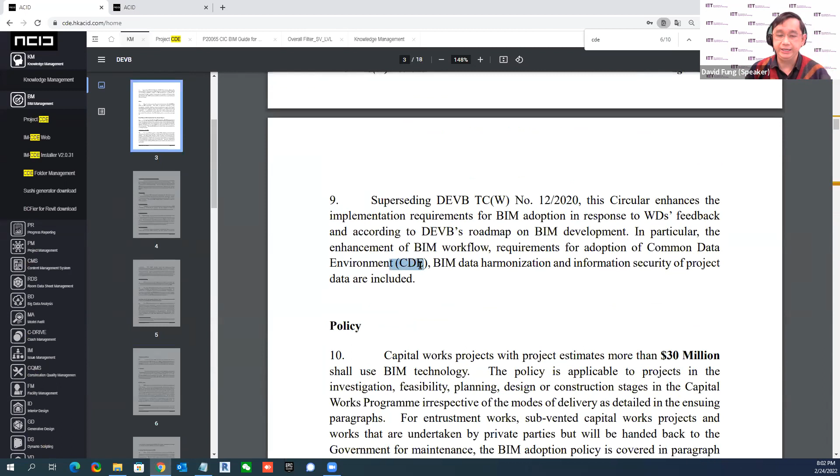Now, 2 more short highlights on this policy. For the first time, the term CDE appeared. CDE is not a new word, but it's now appearing in the technical circular. Every BIM project needs to use CDE. The online collaboration I've been showing you is already in the CDE. In a cloud platform, they take up all these different models and collaborate and review in CDE. So now it's mandatory.

The requirements of CDE involve reviewing the project data requirement, number 1, the data exchange workflow, number 2, and the management strategy, number 3. For the first time, they have this term: departmental CDE. Is the CDE going to be per project or per contract? No. We need to facilitate establishment per department. One department has their own CDE, taking care of hundreds of contracts and tens of projects within that CDE.

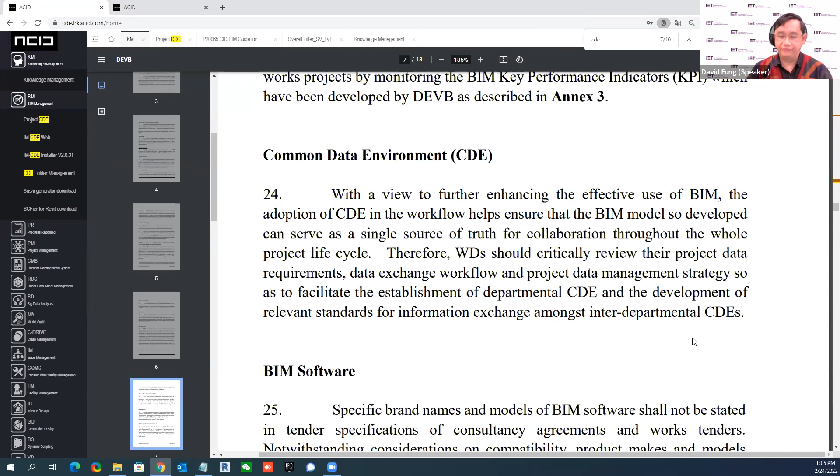Okay, the very last requirement in terms of policy I want to show you. I'm so sorry, we have to try our best to end. Okay, right, just 1 minute, just 1 minute.

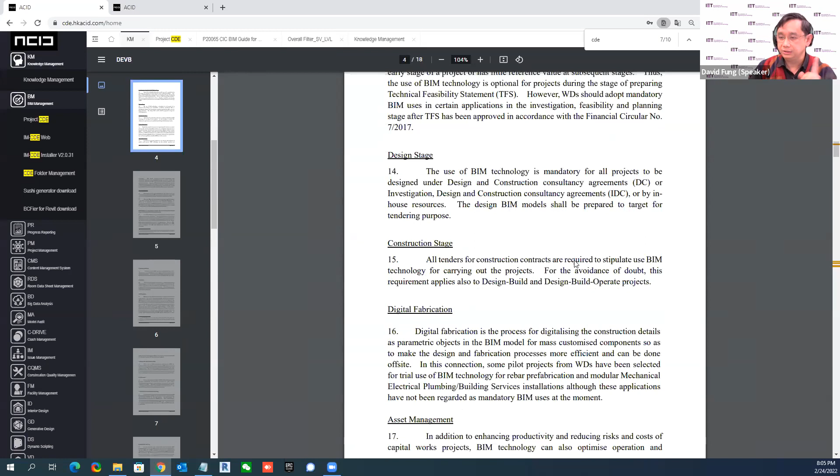All right. So there's a lot of stuff happening in the policy, and definitely 1 hour is not enough. I'm sorry to overrun a little bit. All right, never mind. It's my fault, I should schedule it for 90 minutes. Okay, well, really thanks for your information. I wasn't aware that the technical circular has been launched this year. So it's really changed the industry, as you said, there is a lot of mandatory in the policy as well. So let's focus on the Q&A right now.

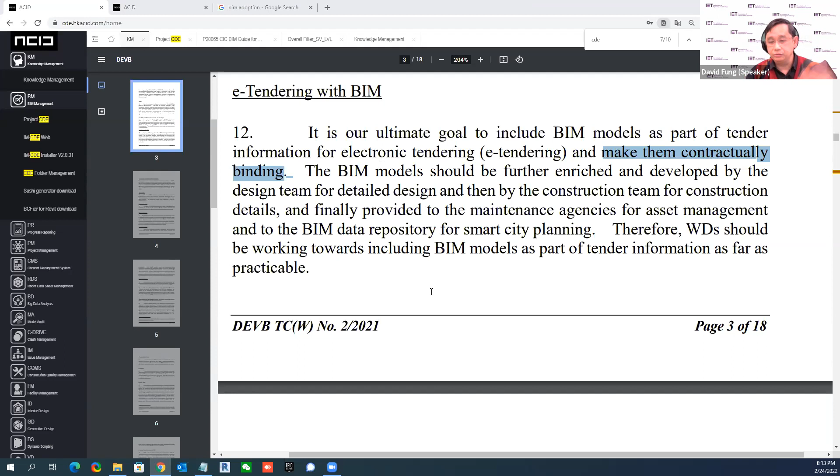Okay. Mr. Wang would like to know, where can we get those documents you showed? Oh, okay. It's simple. This one here, Development Bureau. You just type Development Bureau Technical Circular, and you can find it on their website. And for all the standards, you just type CIC BIM resources. It's a BIM resource publication on the CIC web page. You have all the standards, a lot of them. You can download them all. They're all public information.

Two more here. Is it required to use BIM for tendering? I think it really depends on the tender specification, especially for private sector projects. The last one: many MEP consultants are still using CAD for MEP drawings. Yes, I know. But I think the world is changing right now, especially with the mandatory requirement for government projects. It takes the lead, and then definitely private projects will come along with it.